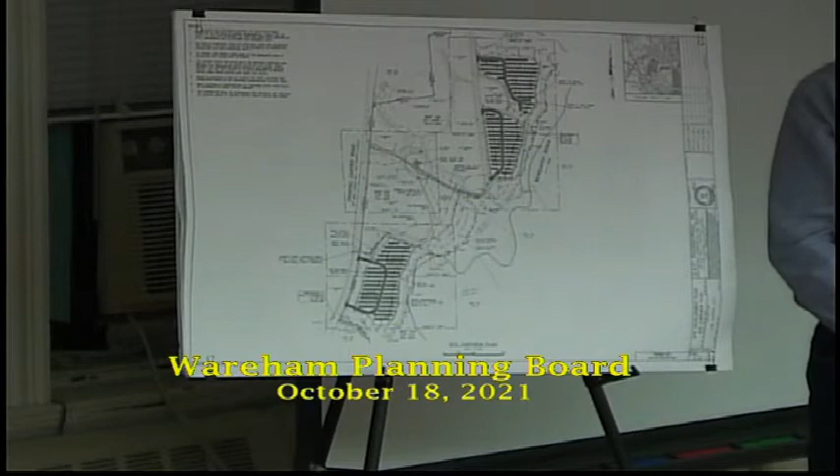All right. So all of our electric equipment, all the panels will feed into one central location, and that's where our concrete pad will be. That's where our transformer, all of our inverters, and our energy storage system will be. So everything will be in the same location. So when we did that 300-foot analysis to the street, it was from this central location. And we won't have anything throughout the array or anywhere else. Again, this being a small project, I've worked on projects where we've had 3, 4, 5 equipment pads. This one just has one.

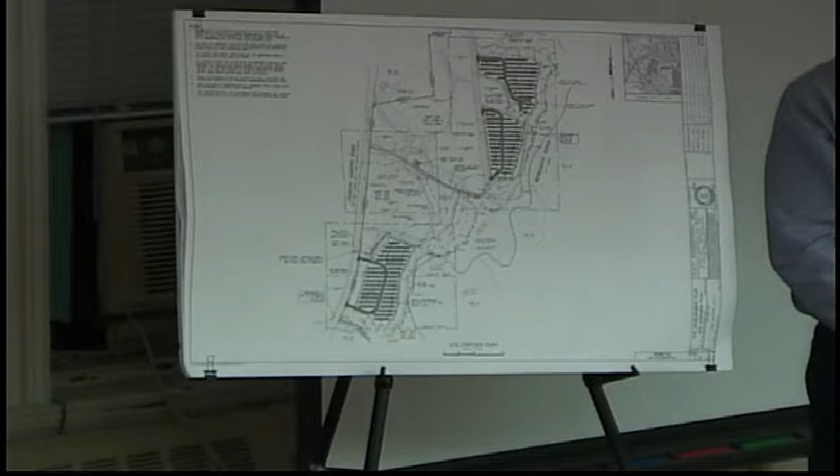And Ms. Wertz, please feel free to jump in. What I felt was more critical, she does talk about the harmonics, which I am just starting to understand a little bit, but more important was the fact that there are multiple inverters and there are multiple transformers. Typically, there's 2 or 3 step up in a row. I haven't reviewed your schematics yet, but is there a cumulative effect, and therefore is it important for us to know the total number? I'm not an audio engineer. I honestly do not have the expertise to answer that, and I'll look into that.

I would say we do just have one transformer and one energy storage system. The way we're designing this, the inverters will be within the energy storage system. Again, being a small project, the way it's designed, it kind of comes pre-packaged. So it'll be within the container, but we can look at the amplifying effect, I think that would be wise. 8 inverters here. Yeah. Okay. Someone else from the public care to speak?

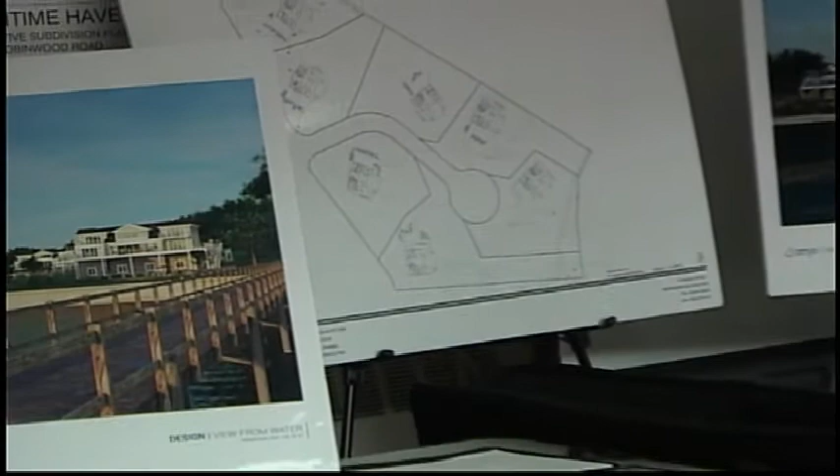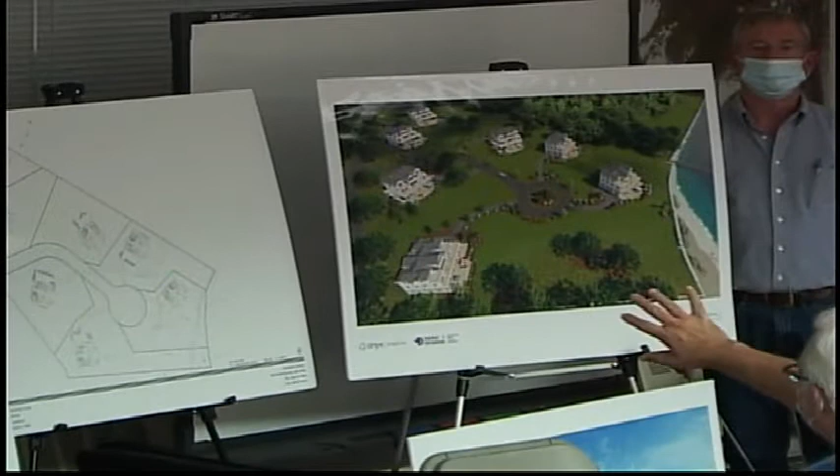And then as far as how they lay out... Are all 7 lots in the high velocity zone? No, they vary. This is kind of a better view of the whole development, because you can see all the houses, kind of 3-dimensional, wrapping around the cul-de-sac. And basically, they're all looking at the ocean. So that was a big deal to make sure the sight lines worked.

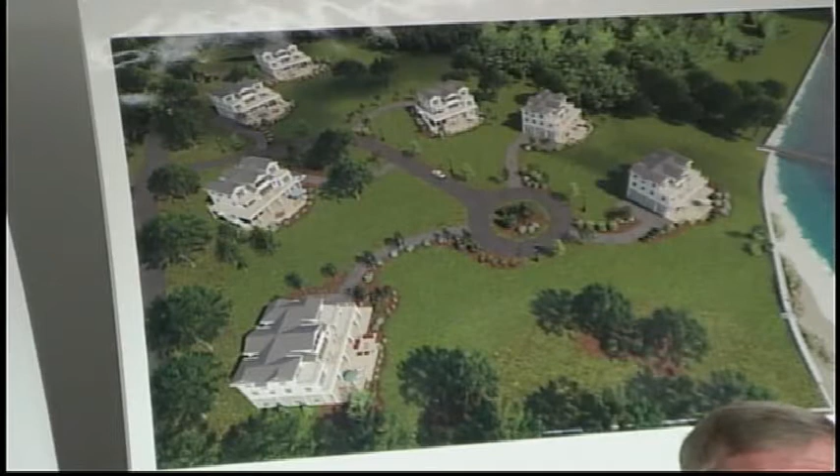And then running through the center of the property is just our road and then a cul-de-sac. They would all have access to the ocean, and we're looking at a dock to be shared. So they're all over the acre. They all have the minimum frontage requirements. And as far as the layout, everything within the houses and the lots themselves are all, for a better choice of words, by right. Everything just complies with all the codes and areas and setbacks and frontage requirements.

The other thing that was important to us, when you do go into the sites, you can see there's a lot of curved drives entering the houses. And that's, again, for 2 reasons. You don't want to just have the drive looking straight at the house if we can avoid it. So we're going to put vegetation around the drives, but also pulling in and out of the drives, you won't see the lights from the cars as much, even within this, never mind on Robinwood, where you wouldn't really see them at all. So everything was kind of curved just to make it softer and a little better living.

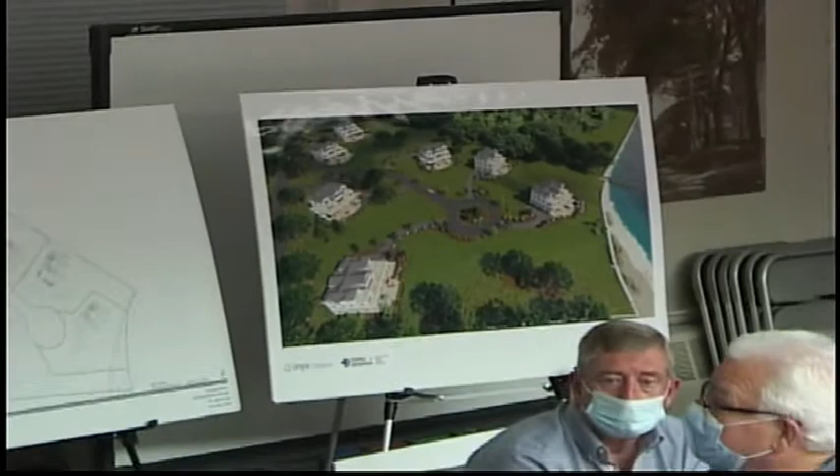And other than that, they're pretty high quality homes. There's nothing here that we've really cut back on when it came to trying to do the right thing, and that was really per their direction. The total amount of cars here, which is one other thing that was important, was we have 7 houses with 2-car garages, so there'd be a total of 14 cars, assuming each guy at least had 2 cars.

And that's about it. Yeah, so that kind of pins down the design and the vision, and we thought it was very important for you to see these visuals. We're really trying to put our best foot forward with the town and the neighbors, and develop something that hopefully the town of Wareham will be proud of, and maybe other developers will see something like this. But we welcome any questions you have.

Mr. Corbett, I'll start with you. The only concern is the water retention. I mean, it's sea level, you have the ocean right there. That's my main concern.

Mr. Scholes? The applicant is requesting 4 waivers. I believe from previous discussions, nothing in the bylaws allows us to grant those waivers. So I'm not sure on that, and that's a question I was going to make. I was under the impression that as a subdivision, we can. Mr. Rowley, can you correct, help me here?

Yeah, Chapter 41, as well as your own rules and regulations, allow you to grant waivers in certain instances. You have to look at what they are, what they're requesting, what the standard is that's in the bylaw, and what they want to go to. Then you vote on each one. But you have the authorization under subdivision. Okay, so that was my first question. Okay, so we'll have to review each of those.

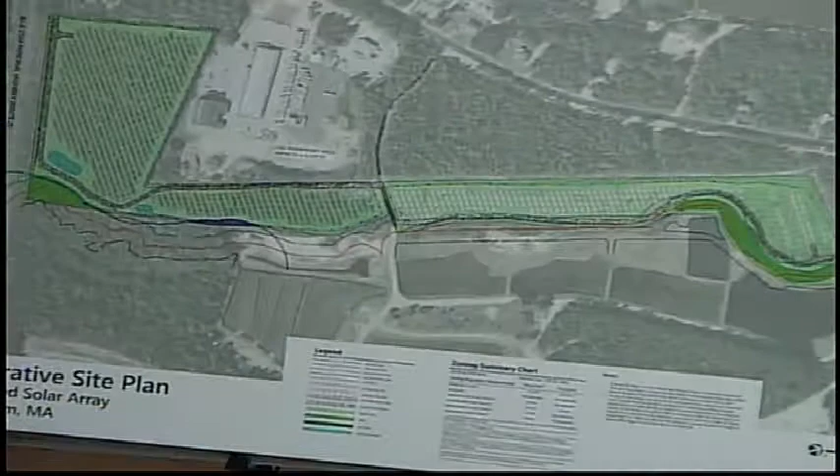I can actually move. May I ask you a big favor? Would you mind putting the easel over here and facing it this way? Or you can just turn it, right there is fine, and just turn it so the audience can see a little bit. That's what I'm trying to do. Oh, yeah. Mr. King, I think you and Mr. Baptiste are familiar with the site.

All right. So the project itself consists of 12.1 acres of solar panels. The entire development, however, within the enclosed fence line is about 19 acres. It includes a new 20-foot wide gravel access path for maintenance and emergency vehicles, the panels themselves, as well as 2 stormwater BMPs, associated utility upgrades, including a new conduit from the solar panels out to Charge Pond Road as well. The fence surrounding the development is going to be 7 feet high for security as well. And at the closest point, the panels are set back at least 26 feet to the property line.

Within the limits of clearing on the south side of the site, we are proposing a meadow mix, both beneath and surrounding the solar panels. This is actually similar in ground cover to the existing woods in terms of runoff rates, which is outlined in the stormwater report that's been included in the application. The report also notes that we're adhering to the 10 Massachusetts standards. We're proposing 2 small infiltration basins at the southeast of the site. We've done preliminary test pits, and the soil conditions noted that it was suitable for infiltration there. Those stormwater BMPs are to achieve peak rate mitigation from the gravel roadway.